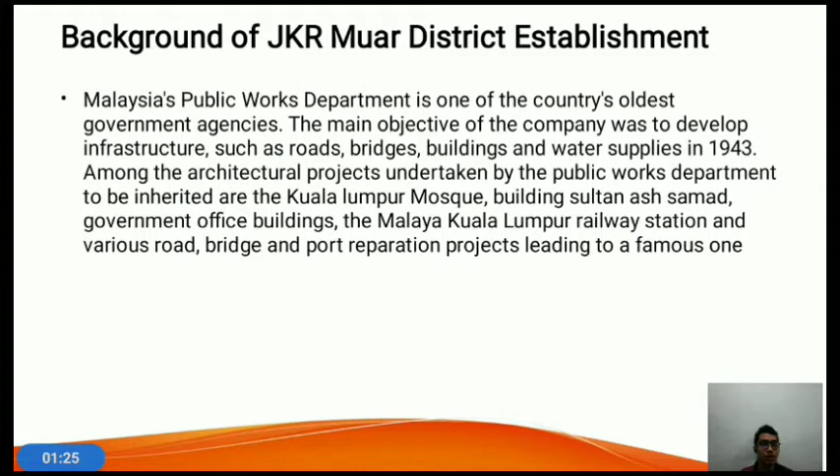Following the end of World War II, this department would focus on reconstructing infrastructure that had been destroyed as a result of the conflict. Despite the fact that the country is in chaos, the Public Work Department is resolute and eager to lead other agencies in building the country.

In the year 1950, a new period of rapid development for new infrastructure projects began. The construction of Kuala Lumpur International Airport (KLIA), Penang International Airport, and the Merdeka Bridge across Sungai Muda, Kedah were among them. Rural Development Planning and the Malayan 5-Year Plan, in which the Public Work Department was given more responsibility than before, had an impact on the country in the early 1960s.

Since 1965, the expatriates have been replaced with a generation of Malayan professionals. They have contributed to the country with enthusiasm and dedication, while upholding the Public Work Department's reputation as a top technical advisor and government implementation agency.

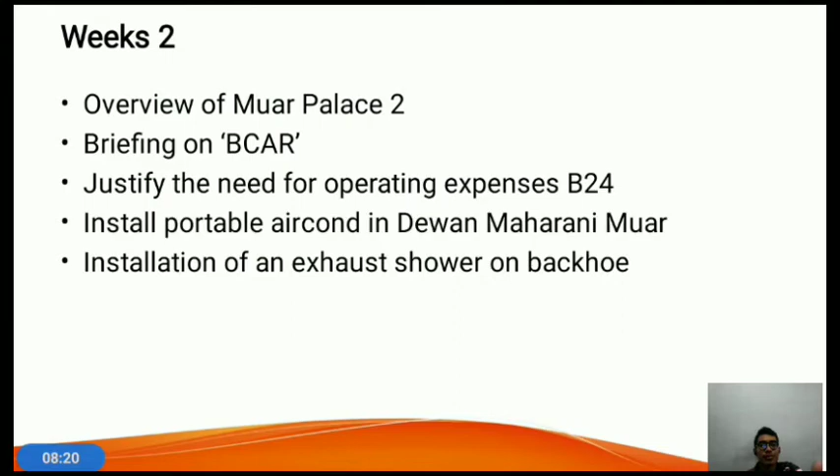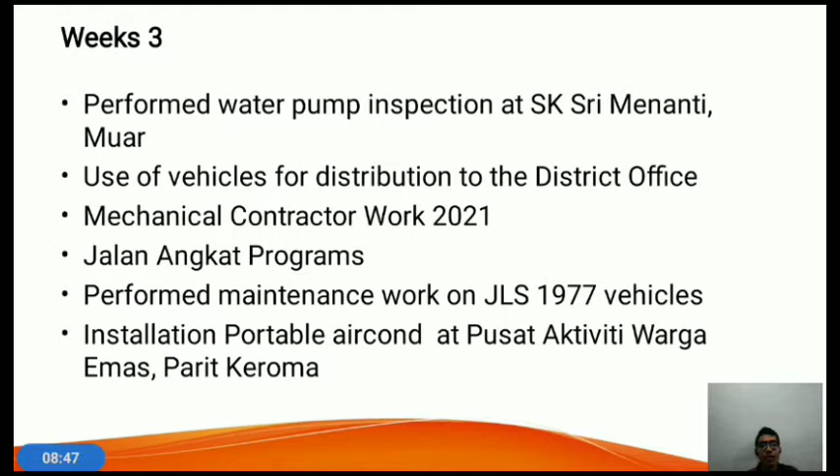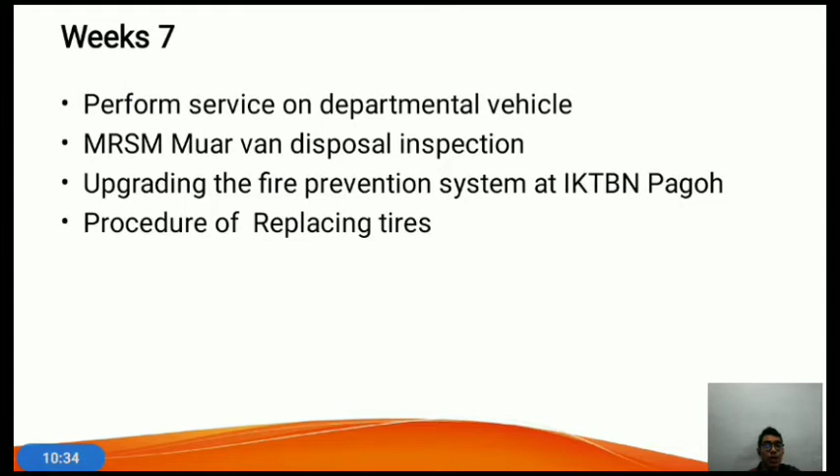Week 7, we perform service on departmental vehicle, MRSM Muar van disposal inspection, upgrading the fire prevention system at IKTBN Pagoh. And then we learn procedure of replacing tire. We inspect the water pump house at Pagoh Police Station. Next, inspecting mechanical work at IKTBN Pagoh.

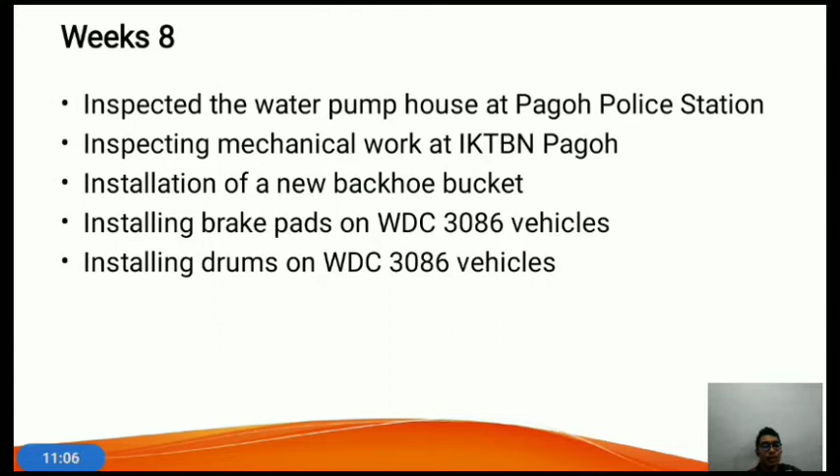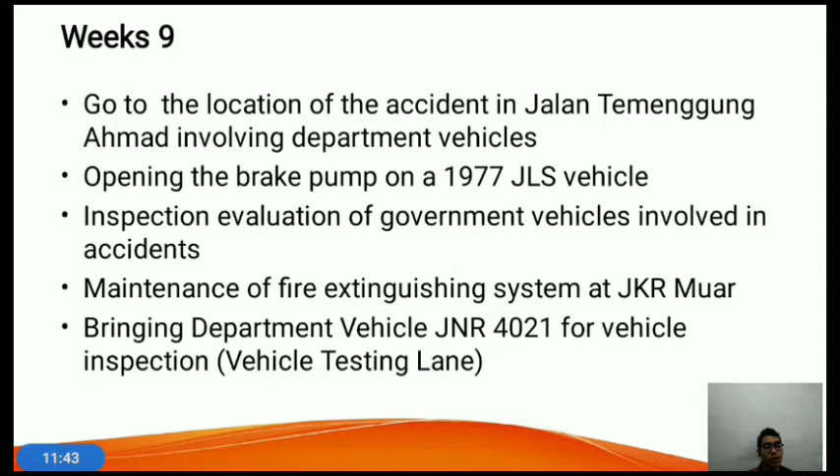At week 9, we go to the location of the incident in Jalan Temenggung Ahmad involving a department vehicle. After that, the next day, we open the brake pump on JLS 1977 vehicle, and then we do inspection evaluation of government vehicle involved in accident, maintenance of fire extinguishing system at JKR Muar, and then last day we bring department vehicle JNR 4021 for vehicle inspection, vehicle testing lane.

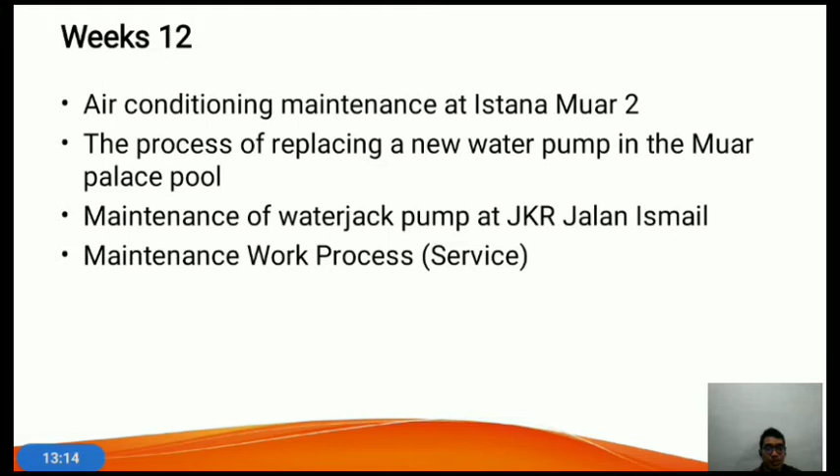Week 12, we do air conditioning maintenance service at Istana Muar 2, and then the process of replacing a new water pump in the Muar Palace pool. Next day, we do the maintenance of waterjack pump at JKR Jalan Ismail mechanical, and then we do maintenance work process service.

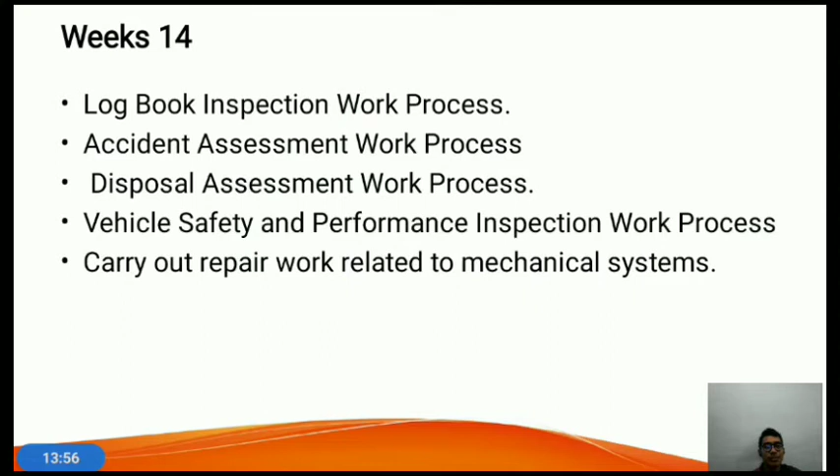Week 14, logbook inspection work process, accident assessment work process, disposal assessment work process, vehicle safety and performance inspection work process, carry out repair work related to mechanical system, work process for repairing and inspecting damaged vehicle or mechanical equipment.

After that, we do the work process to help the officer inspect the vehicle to be disposed of, and then we do work process to help manage program related to the two department of state government.

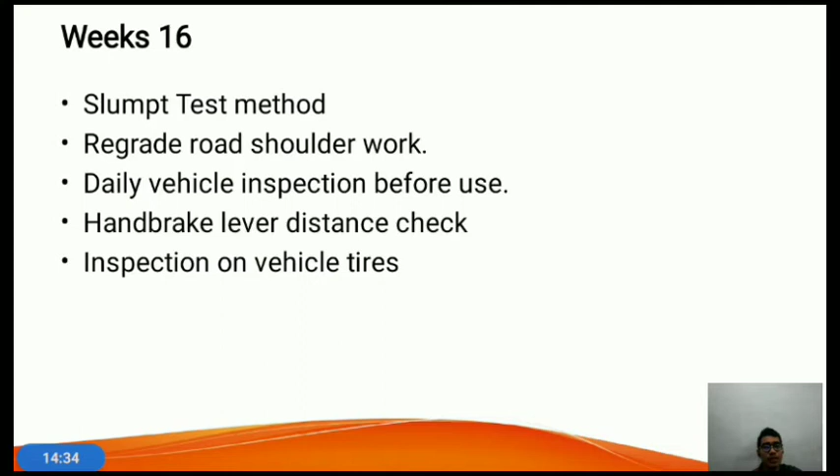Week 16, we learn about the slump test method, and then regrade road shoulder work, daily vehicle inspection before use, handbrake lever distance check, inspection of vehicle tire, and then we do some slump tests.

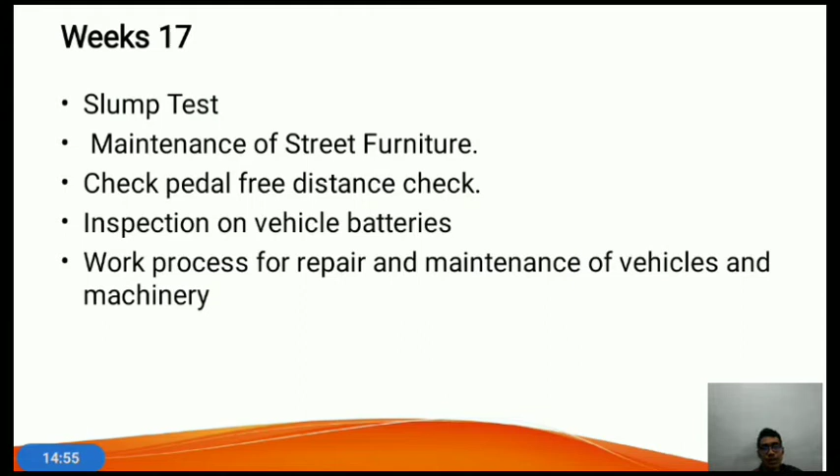Next, maintenance of street furniture. Then the third check, pedal free distance check, inspection on vehicle battery. The last day, work process for repair and maintenance of vehicle and machinery.

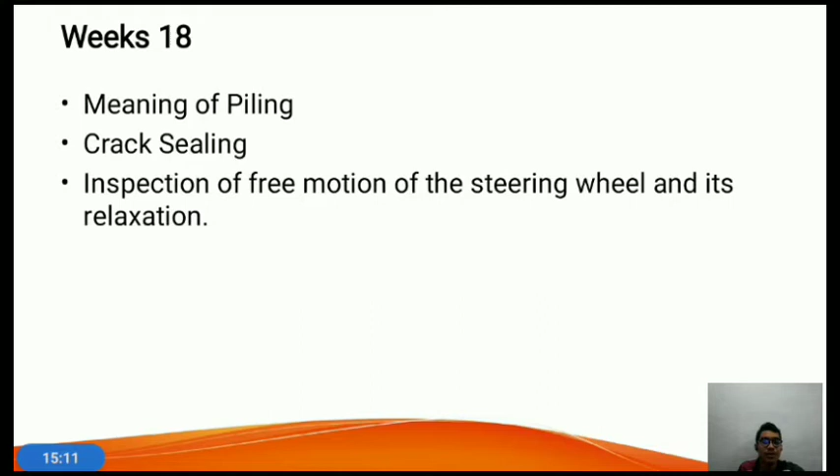Week 18, we do some research on meaning of piling, crack sealing, and inspection of free motion of the steering wheel and its relaxation. Week 19, we go ground beam with research on premix coating, penurapan, inspection of tire pressure, damage and wear, inspection of vehicle engine.

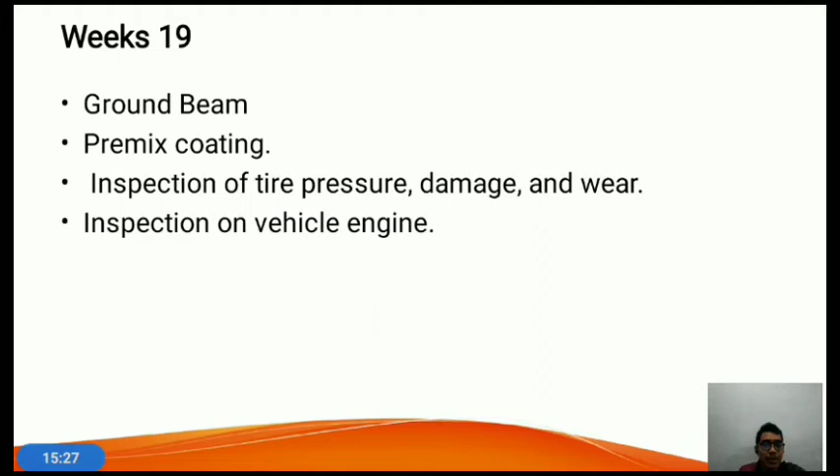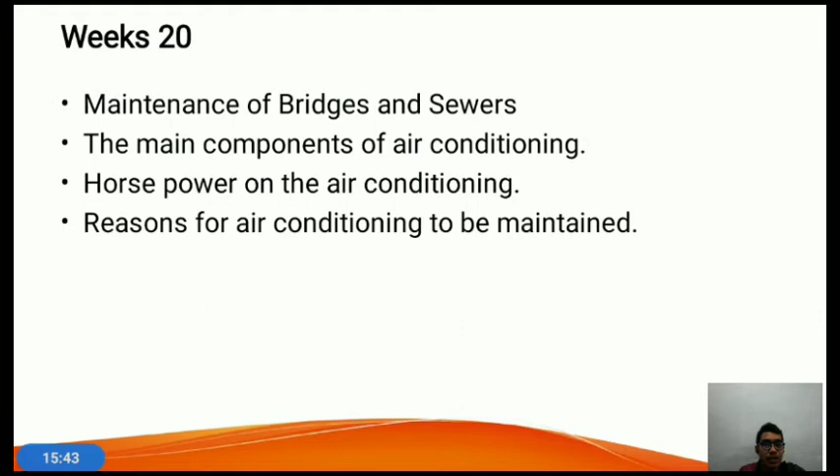The last week, week 20, we do maintenance of bridge and sewers, the main component of air conditioning. Horsepower on the air conditioning, reason for air conditioning to be maintained.

Three activities learned from internship. Vehicle evaluation department, the vehicle government involved in accident. When there is any incident involving a government department vehicle with a public vehicle, the public work department is required to conduct an inspection on the vehicle for assessment and estimate the cost of damage suffered by the vehicle.

This assessment process is only done by the PWD or Public Work Department, but for cases involving anyone who is guilty of the incident, it's handed over to the police who solve it.

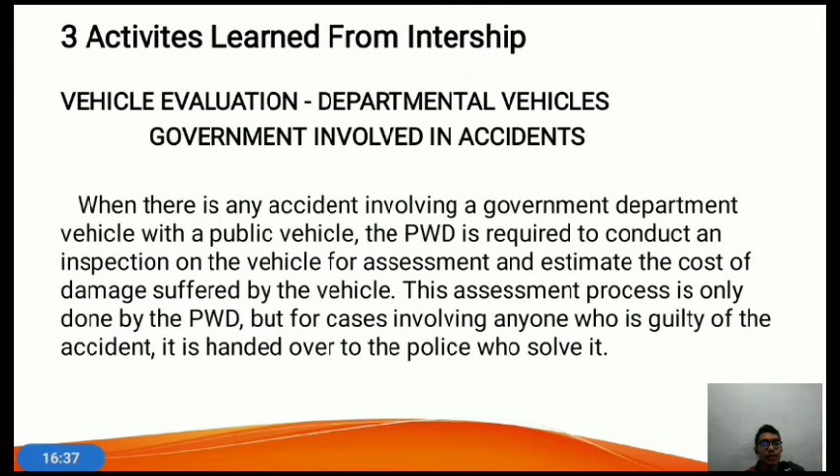This is the work process for the vehicle evaluation test. First, we receive a call from the relevant police station, and next go to the police station together with one or two workshop workers, and then meet the relevant police officer and ask for 2 sets of AM362B damage report form for the vehicle involved.

Check in detail the condition of government department vehicle and public vehicle involved. And next, we take a picture of the vehicle involved in the incident, and then we make 2 photocopies of the general form, 1 copy for government and another for public vehicle. Then, list the detail of the damage together with the price and year of purchase for the 2 vehicles in photocopy.

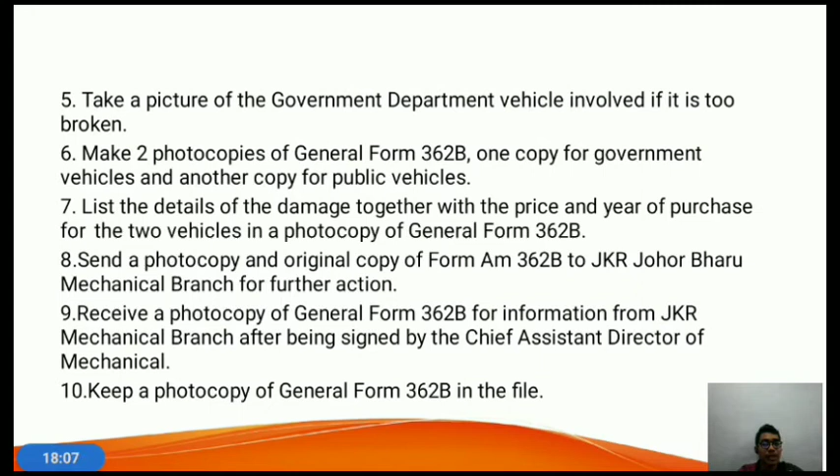And then send a photocopy and original copy of form to JKR of Johor Bahru Mechanical Branch for further action. And then we receive a photocopy of the general form for information from JKR Mechanical Branch after being signed by the Chief Assistant Director of Mechanical. And lastly, keep a photocopy of the general form in the file.

This is an example involving an accident between a government department vehicle and a public vehicle.

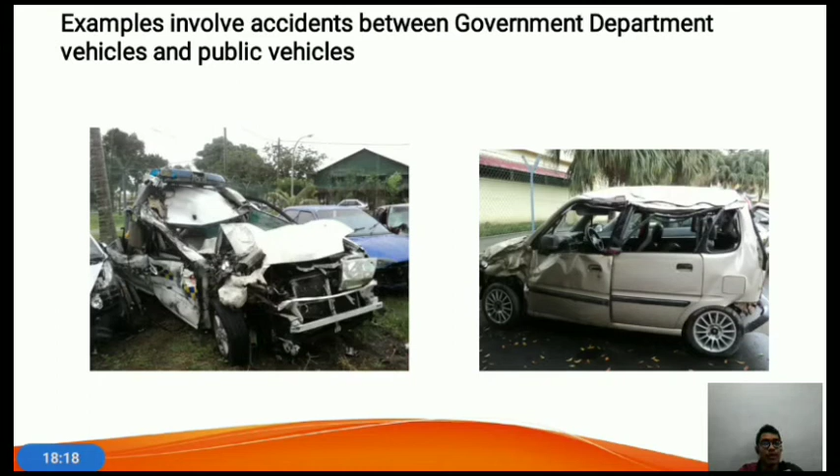Next, the second activity that I do is air conditioning maintenance. The first is the air filter. We wash it with a vacuum cleaner or tap it gently, then wash with warm water along with neutral soap. Then we do the indoor unit, cleaning dust or dirt on the outer floor or box with a damp cloth.

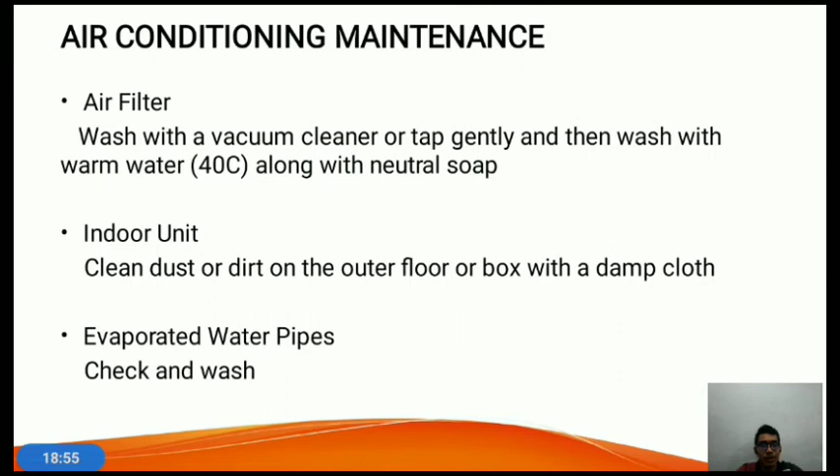Next, evaporator water pipes - check and wash. Indoor unit fan - check for unusual noise. Indoor or outdoor unit coil - inspect and clean for dirt on aluminum fins. Inspect and remove obstructions to the passage of air in and out of the indoor or outdoor unit.

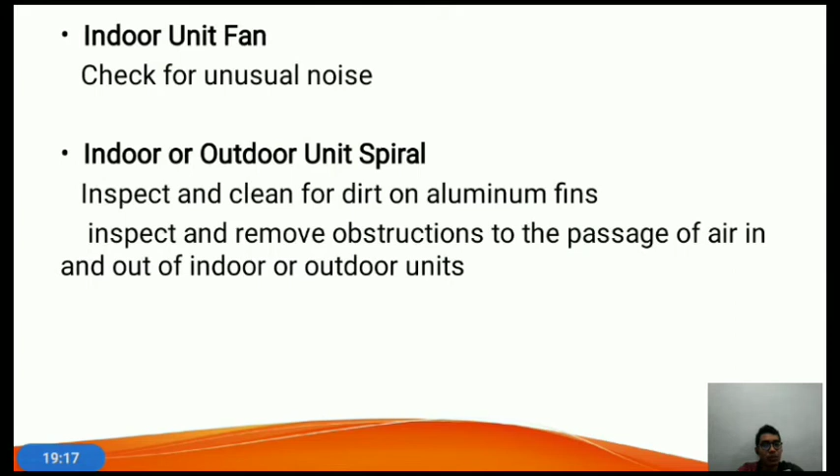The activity: vehicle repair and maintenance. First, we check the tire. Checking the condition of the tire is an important thing which must be done first before traveling long distance at high speed.

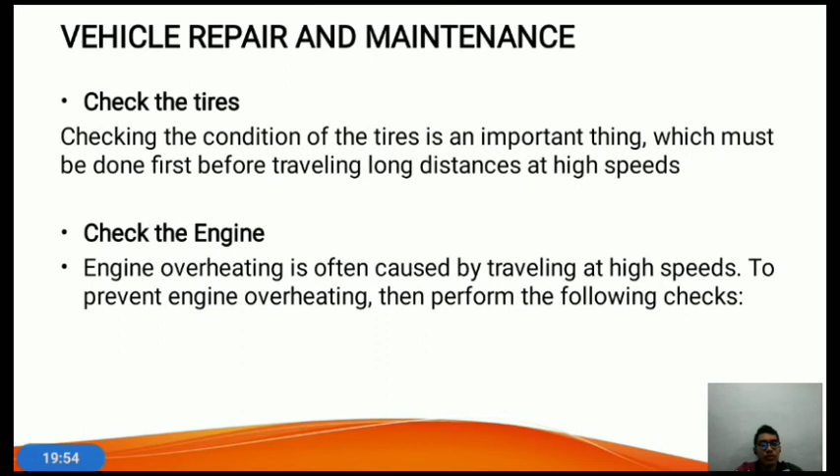Next, check the engine. Engine overheating is often caused by traveling at high speed. To prevent engine overheating, perform the following checks: cooling water leak - make sure there are no leaks. Fill water into the radiator, and check the radiator cover and fan belt.

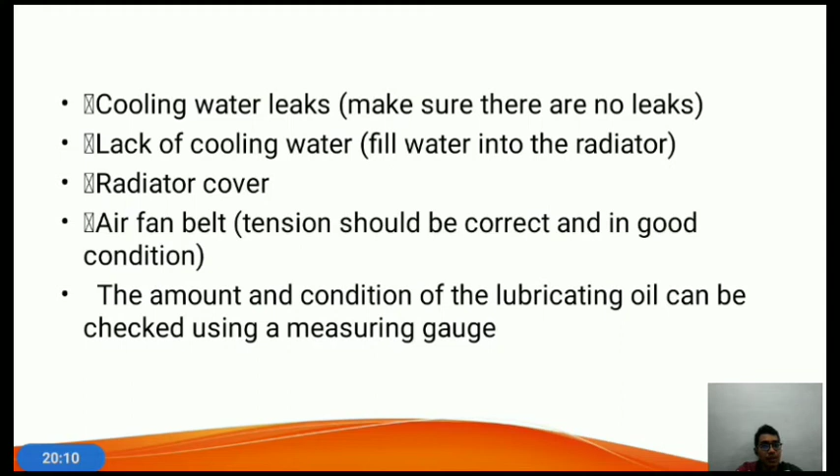Tension should be correct and in good condition. The amount and condition of lubricating oil can be checked using a measuring gauge. Next, we check the brake.

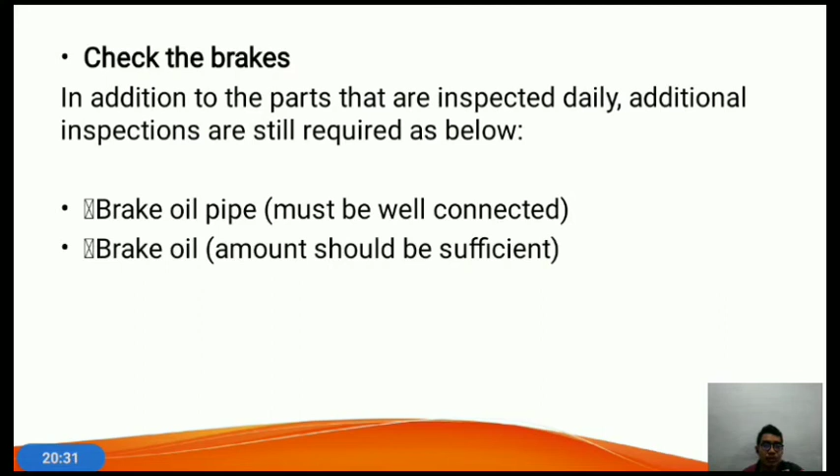In addition to the parts that are inspected daily, additional inspections are still required as below. The brake oil pipe must be well connected. The brake oil amount should be sufficient.

Then we check the steering wheel. Check the steering wheel for free movement, flexibility, rocking and ease of movement. To check this, drive the vehicle and observe for vibration or a tendency to rotate in one direction.

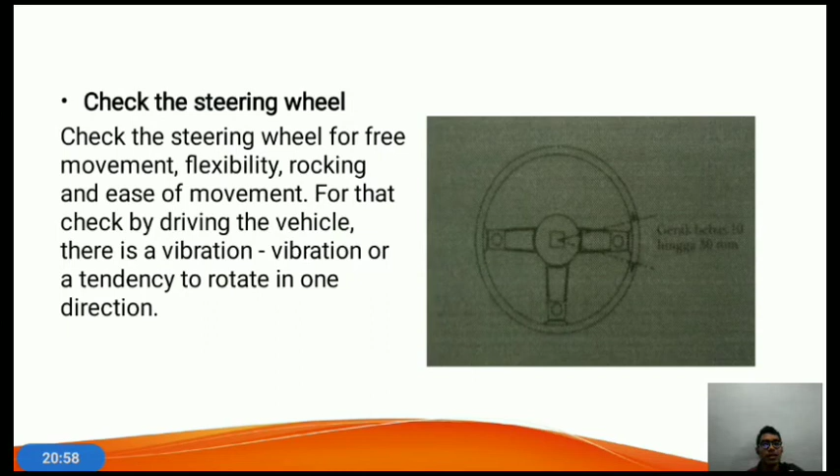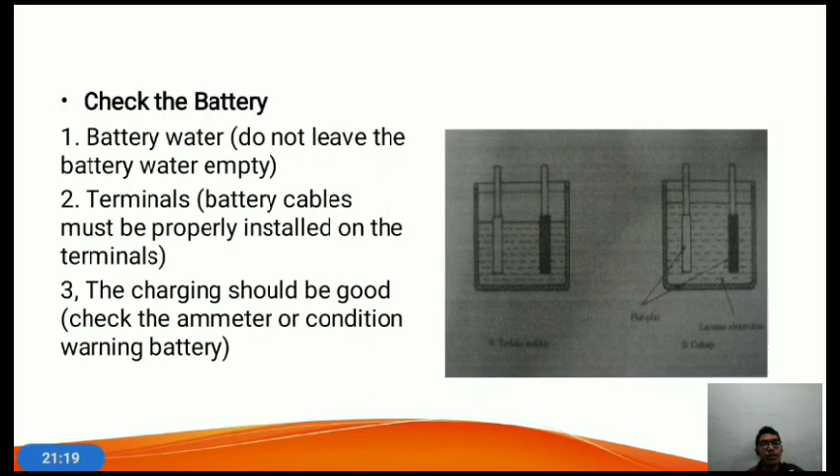Work strategy: a detailed and organized work plan is important, so a job must have an organized system so that each job can be carried out systematically. Record all data in a special book in addition to being stored in the computer.

Next, development and training. Everyone has their own expertise. Therefore, to get better at a job, one must refer to experienced people. Experienced people should also not ignore the feedback of new people, because each piece of feedback will add to their growth.

The third one is contractor cooperation. Sometimes not all technical faults can be resolved by the technical site. Therefore, the contractor must cooperate by first reviewing the environmental conditions before issuing a quotation. The contractor is obliged to complete the work according to the prescribed period.

Next, improve service quality. The quality of service work is important, especially for the operation of a job. Every employer must maintain existing service quality while also improving toward greater excellence. In this way, minimal damage can be achieved.